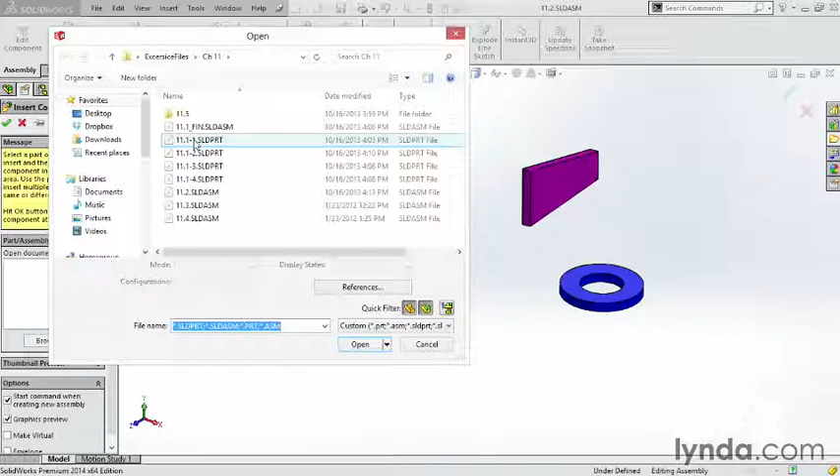In this case, I'll click on the first part and click Open. You can see it's attached to my cursor. If I want to place another one of these same parts in the assembly, you can have as many of the same existing part as you'd like. When you're happy with that, click OK, and it places it in the assembly. It's a quick way to add new components.

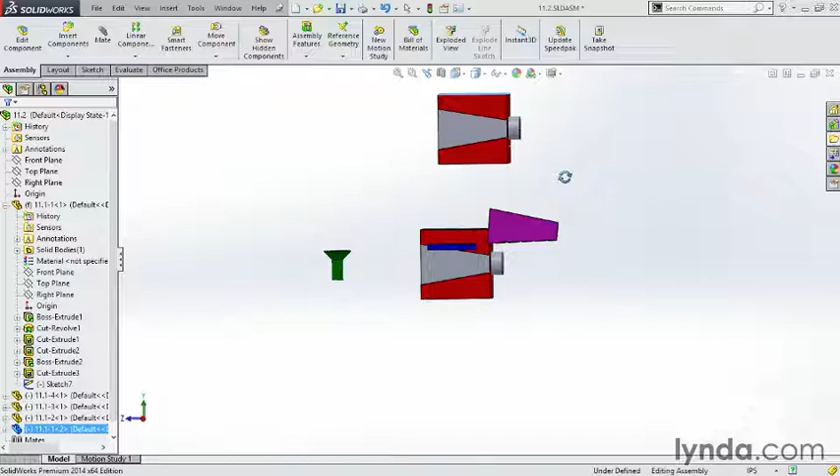Next, I'd like to line everything up so I can easily see how to put these components together. So I'm going to drag this over here, but notice I'm dragging it in 3D, so if I spin it around, you can see it's actually quite a bit higher. Sometimes it's handy to look at this in a different view mode—maybe look at the top of the parts and align them like this first, then switch to a view that looks from the side and bring these down. This quickly allows you to move things around in the correct orientation.

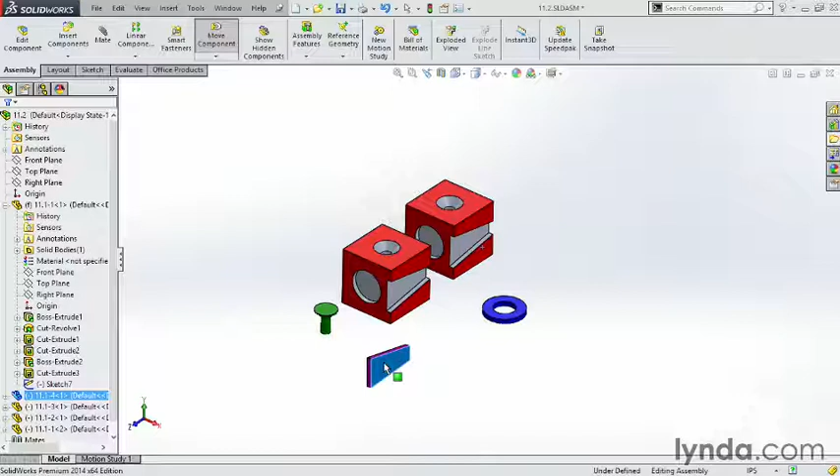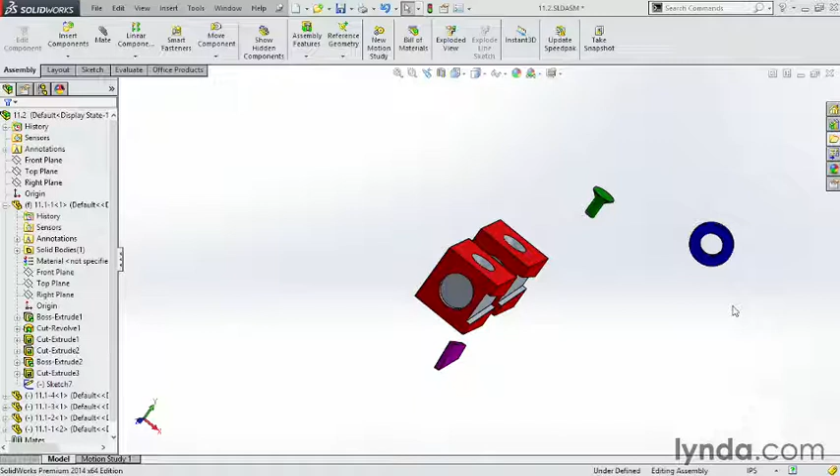Next, I have this component here, and I'd like to have it close to this slot, so let's put it over here. And this little green pin-looking thing, let's put that up above. We have this little washer here—let's spin that around holding down the right mouse button to get it close to the right orientation. It doesn't have to be perfect. Then I'll bring that around and place it close to the end of where this other pin is. Now things are fairly close, but we might want to move them around a couple more times to get them a little closer.

That's the key to building assemblies correctly the first time: getting the components in there, knowing what they are, what they're supposed to be doing, and how we want to mate them together.

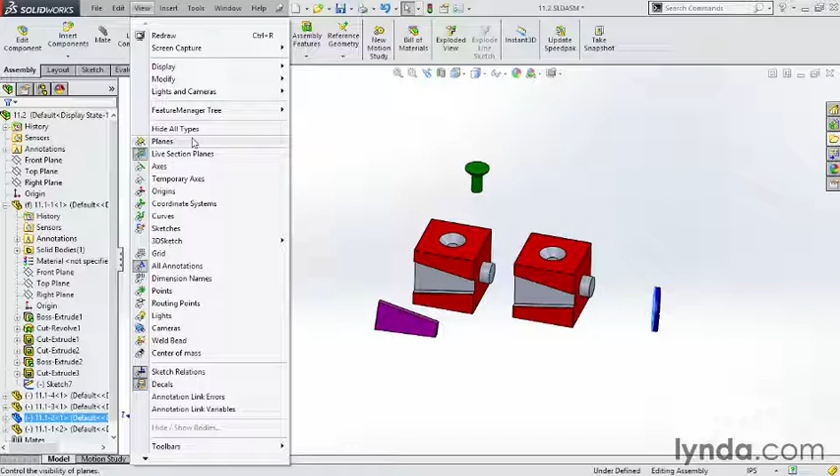Also, I want to point out you can turn on and view sketches, planes, axes, or any other viewable items through this list, so you can easily locate the parts. For instance, if I turn on origins, you can see the origins of all the parts, and if I turn it off, you can hide that.

You might also want to use the planes to mate one component to the next. Notice each individual component, if you expand it out, has all the original planes you started with, plus whatever features were used to create the part. So if I go to the front plane, I can say I'd like to show that plane. If you don't see it right away, more than likely under View at the top, planes aren't turned on, so make sure you turn that on, and then in the View palette I'll be able to see it. Same with the right plane—turn that on and it'll automatically show. Same thing with a component like this: if I open it up, I can click on the front plane, click Show, and because these components are the same, it shows on both of them.

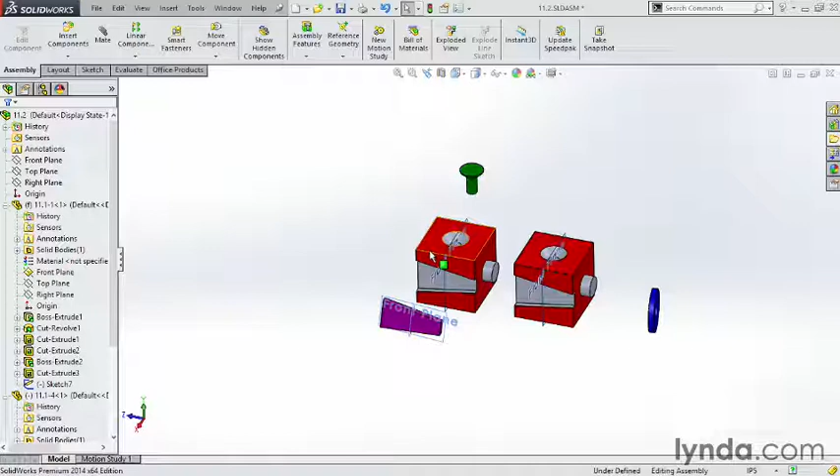Those are the first steps in getting ready to build an assembly, and next we're going to be doing some mates. The steps laid out in this video will be repeated in every part of every assembly. Getting the parts laid out well will help you get your model assembled quickly and with fewer errors.